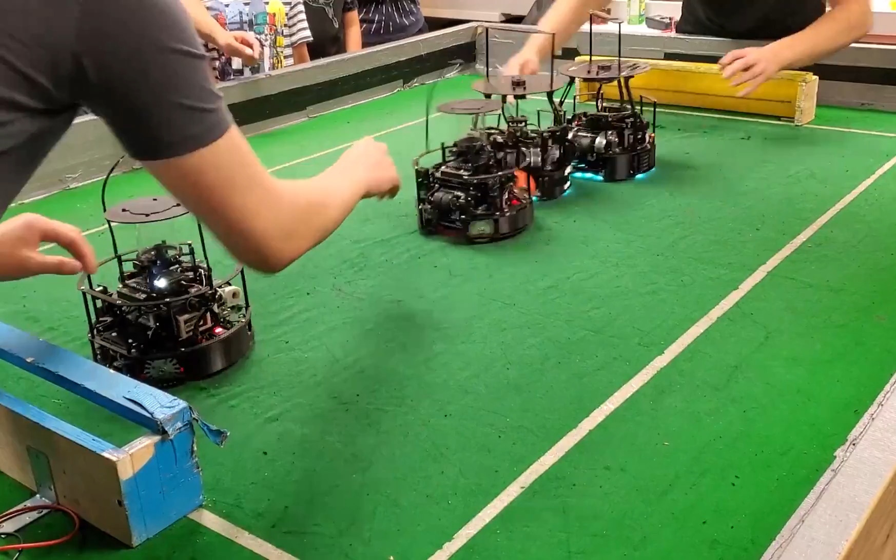Meet my robot. Built around a quad omnidirectional motor drive, it was made to compete against the very best in the RoboCup competition. With 2 dribblers, 2 kickers, and an omnidirectional camera, this robot placed second in the world for open weight. This is not my project, because it is garbage.

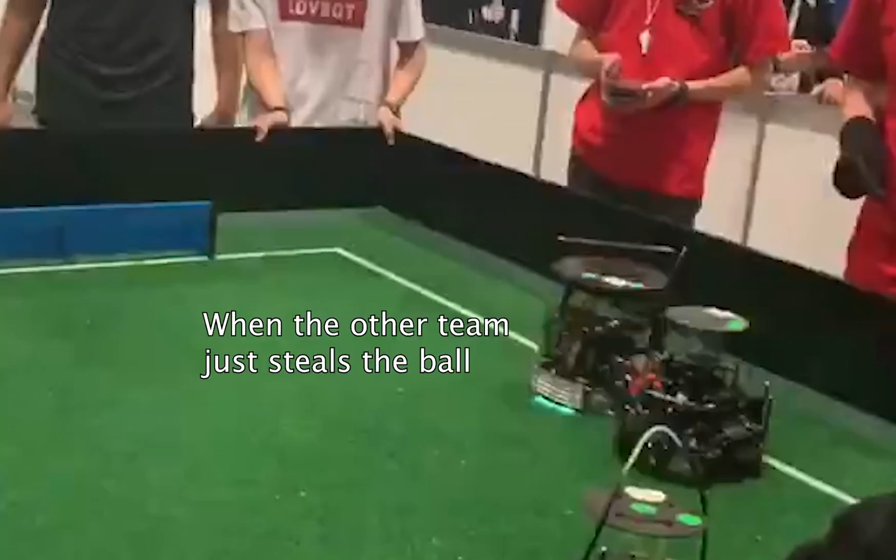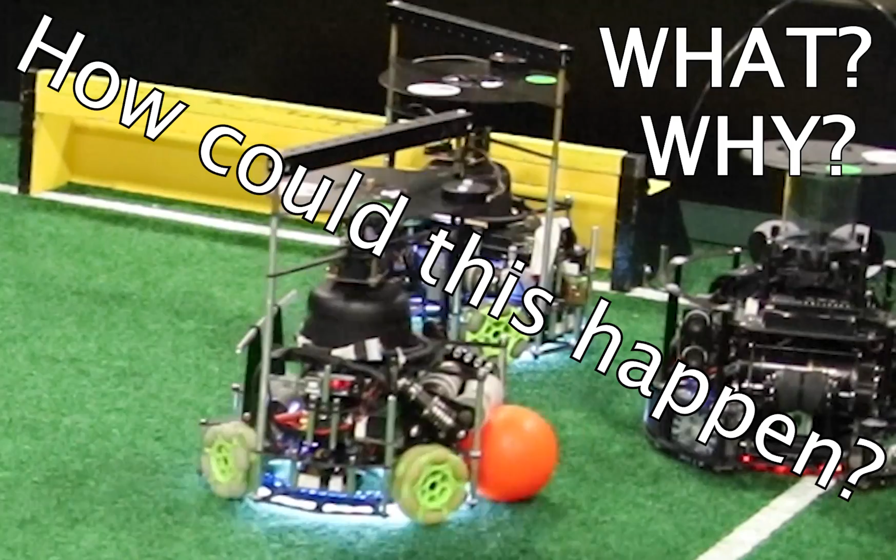The frame is too high, dribblers too weak, and one of the kickers doesn't even kick properly. It also has a problem where if you hit it hard enough, the buttons go all wonky and the entire thing shuts off. Like, what? Why? How does this happen? Come on! That's why I'm making it better.

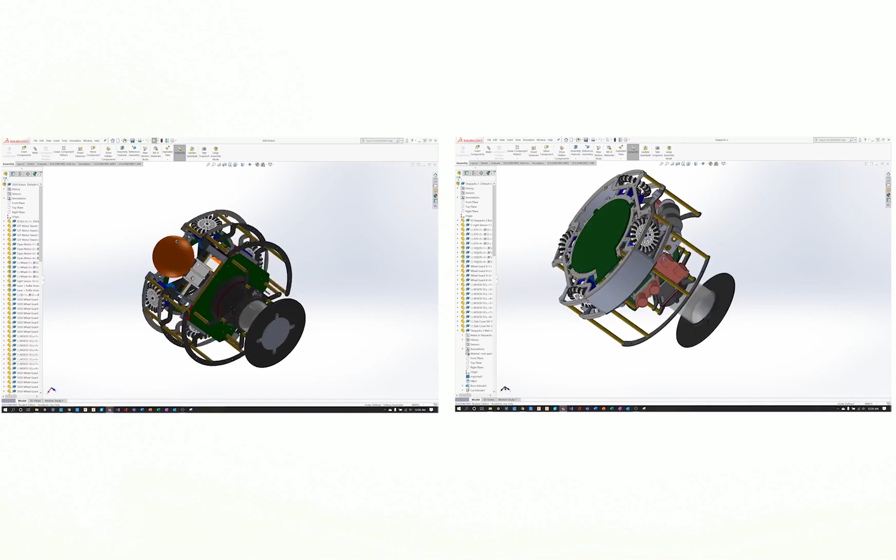So this is the new design. As you can see, it's similar yet different from the older version. It actually possesses a number of improvements, including a more optimized design, more features, better stability, and a lighter weight.

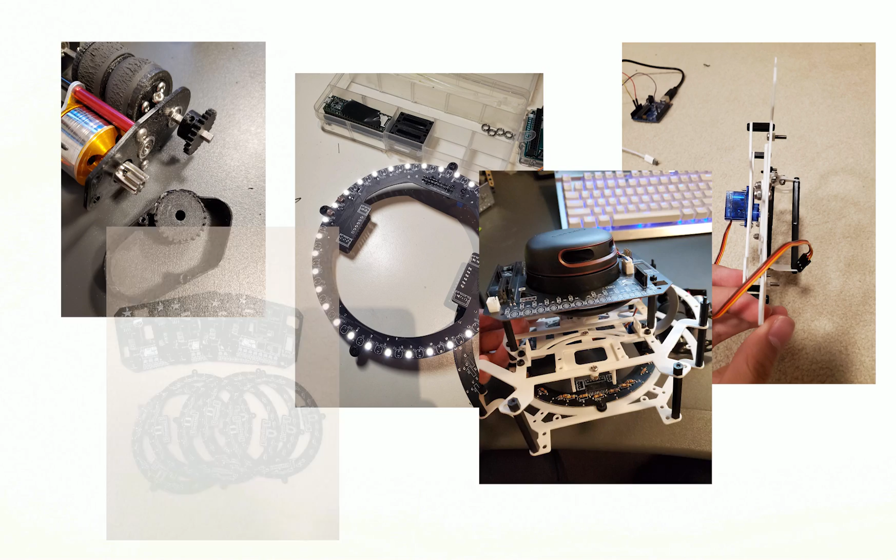I initially had the idea to complete everything and build it. But then COVID-19 happened. The supply chains for a lot of what I needed disappeared, meaning all that I had left was a series of incomplete components and designs. So essentially, that's what this project is going to be about.

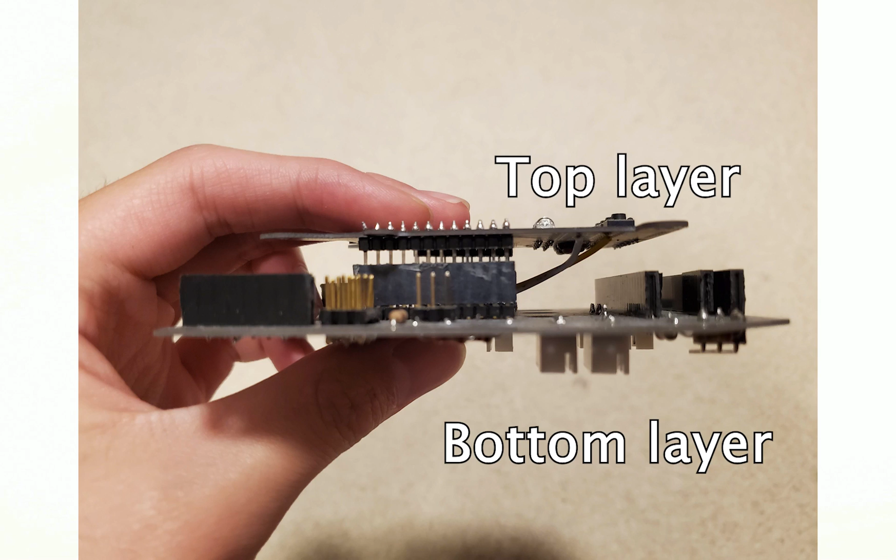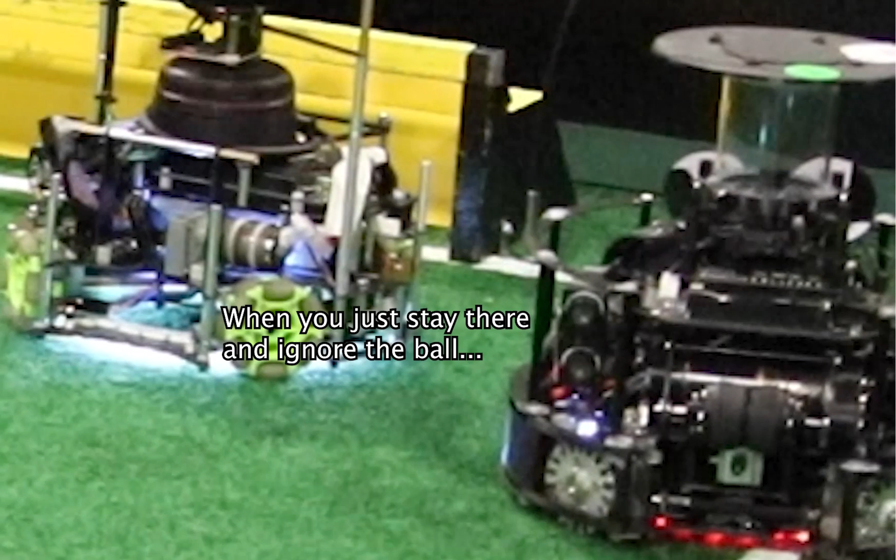One of the biggest issues with the old design: the buttons didn't work. When creating the previous design, I split the PCB into 2 sections, with the buttons on top and the main processor on the bottom. The issue? The connection was really dodgy, meaning the signal would randomly flicker and cause the robot to brick in the middle of the game. And if you can't tell, that isn't a good thing.

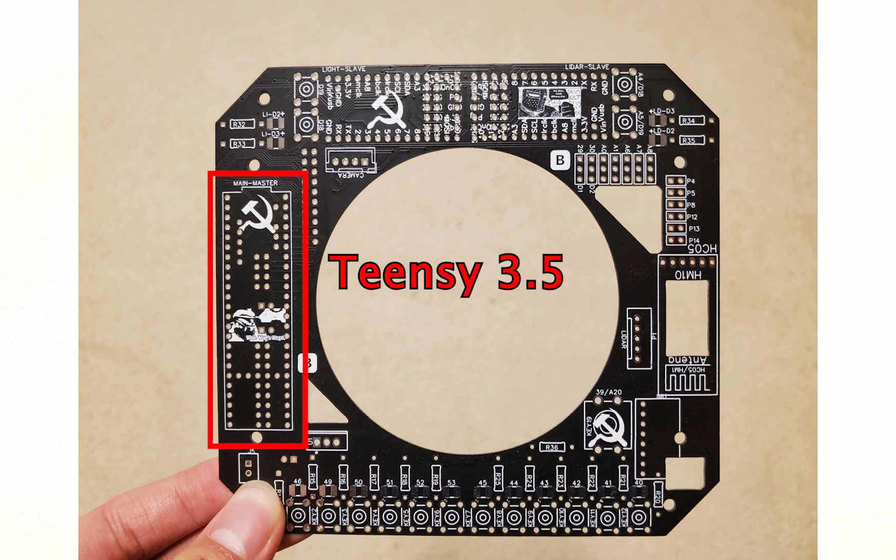So the first thing I did was take the old PCB and start working from scratch. The new design incorporated both layers into the same PCB, getting rid of the connection issues. I also replaced the processors, exchanging the 2 Teensy 3.5s with a single 3.5 and 2 of the new 4.0s, thus increasing the number of processors from 2 to 3. Because more equals better, obviously.

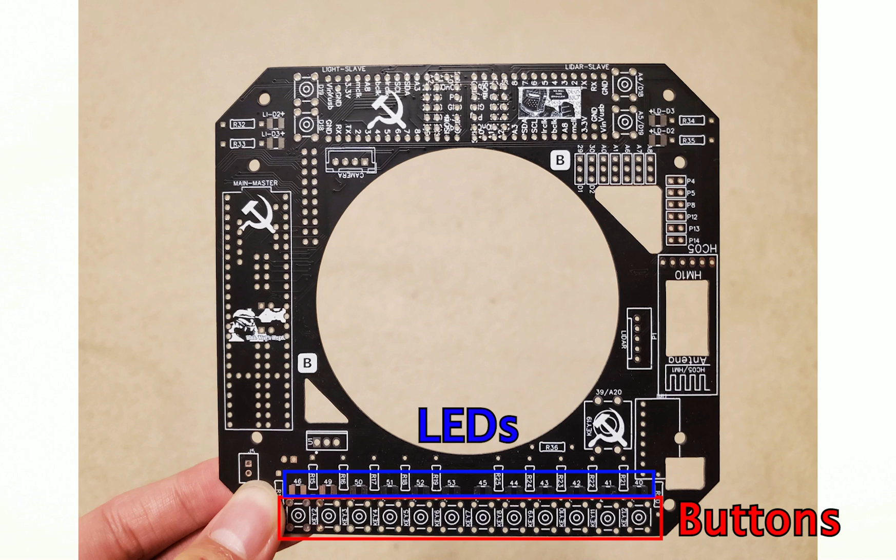The new design also incorporated a number of features, including more buttons and LEDs for better controls, a space for a Bluetooth module allowing communication between robots, and a small accelerometer, saving on weight. It also has a giant hole in the middle of it. We'll get to that later.

Next came the light sensor. The old one was nice, except for the fact that it was too tall, too fragile, and had this weird offset shape because I had to fit an entire processor under there. Essentially, it was all around not a good design. They also had another really annoying issue.

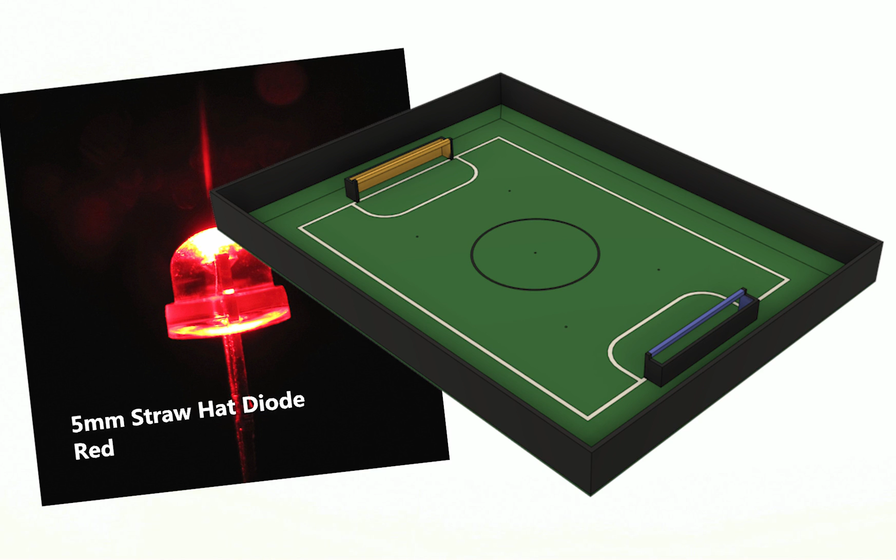When I was designing the original one, I thought, okay, you know what'll be a really good idea? Using some red LEDs because they offer the greatest contrast against a green field. Big brain move, am I right? As it turned out, nope. The color of the LED plus light bleed caused another issue. Essentially, ball equals orange, LED equals red. Robot cameras are bad, therefore orange equals red. Thus, other robots think ball equals LED, which is a big no-no.

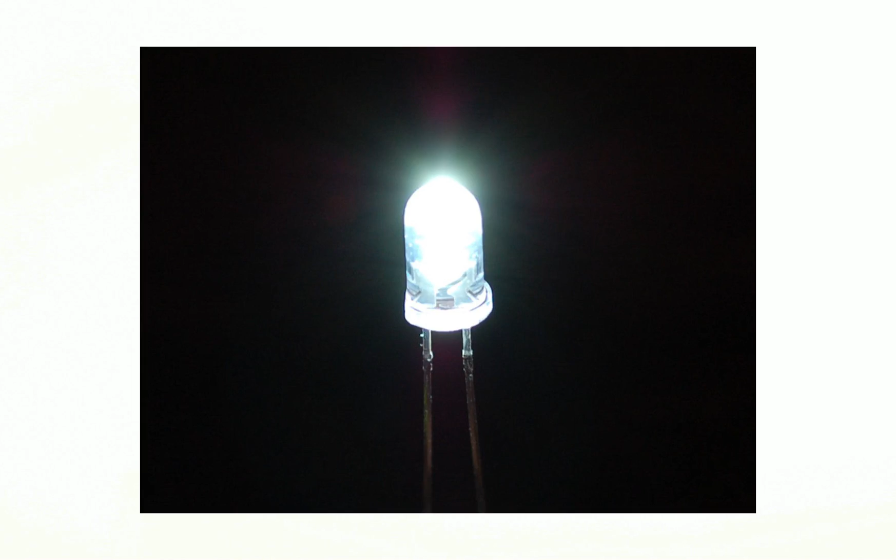Last year, we had to try and make do with electrical tape, and I was seriously not interested in going through that hassle again. So the solution? To stick with the old white LEDs. And hey, while I was at it, I decided to add some more light sensors as well, increasing the number from 24 to 32. Now that that was done, I decided to tackle another issue: the fact the light sensor looked like a flattened popsicle.

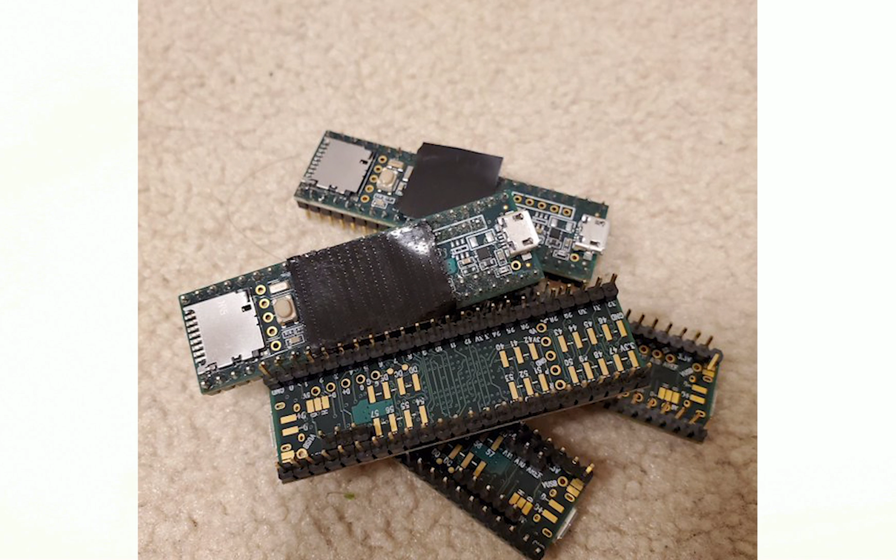In previous years, I placed the light sensor teensy at the bottom for convenience, but this year I decided to put it at the top instead, making it easier to access and replace, because boy did it take a long time to fix. And if the fact that we had an entire pile of broken teensies was anything to go by, we burned through these faster than stores selling toilet paper.

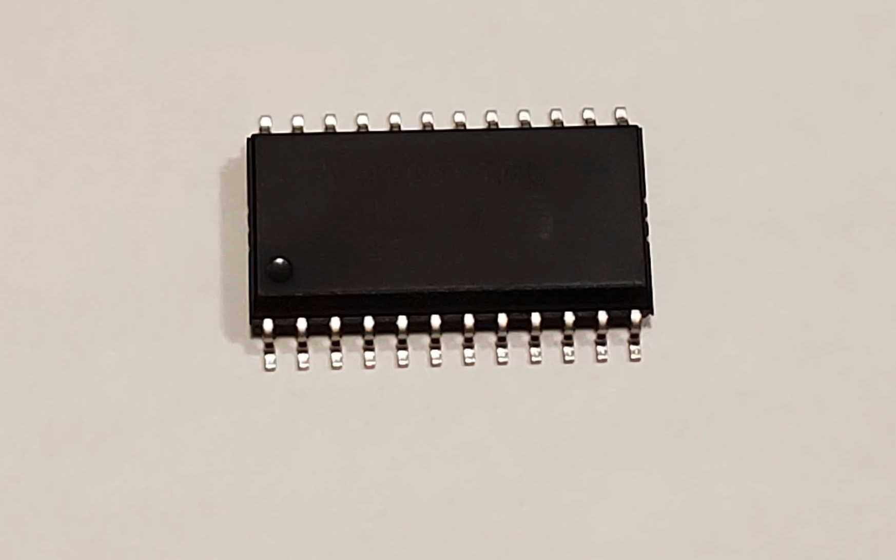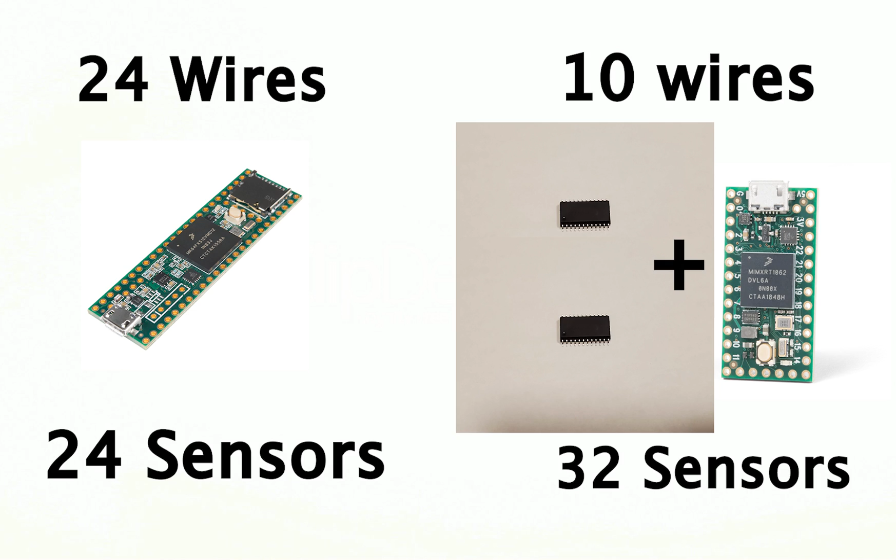There was also the issue of cables, so to resolve this, I used a multiplexer. A multiplexer is essentially a switch which connects one read wire to multiple sensor connectors, changing the 24 wires needed for 24 sensors to 10 needed for 32 sensors. All in all, a pretty good deal.

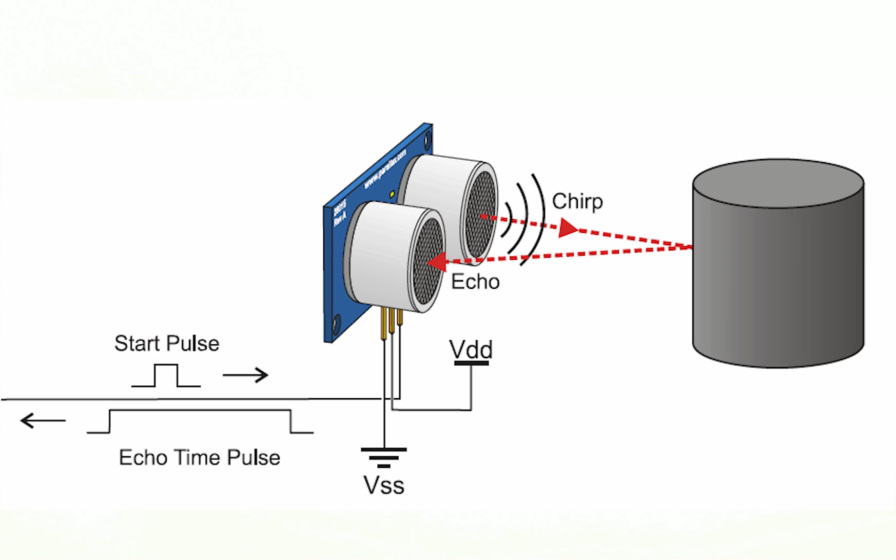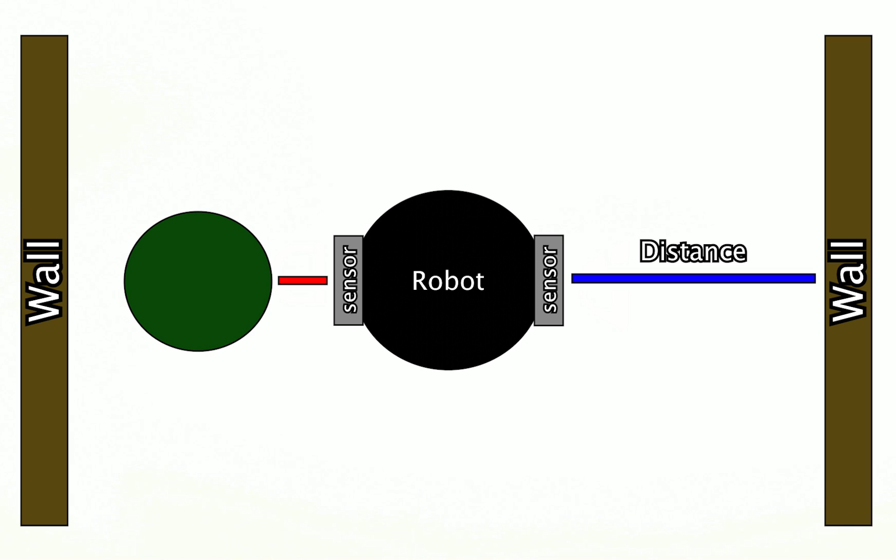Another issue I attempted to address had to do with the robot's ultrasonic sensors. Ultrasonic sensors are used to measure a distance, and placing one on each side of the robot can help you get its coordinates on the field, letting it know its location. But there's one big problem: as soon as something goes in between the sensor and the wall, everything starts falling apart. The robot doesn't know which is the real value and which is the incorrect one, and the location becomes lost with the entire thing going all whack.

So what's the solution? If measuring 2 values isn't good enough, why not measure all of them? This sounds a bit crazy, but hear me out. This is the Slamtec RPLIDAR. It costs a lot of money, but hey, I got it on sale, so might as well use it. It is essentially a spinning distance sensor, allowing someone to measure a distance in a 360-degree radius. That way, even if a range of values is blocked by another robot, the sensor can just see around it.

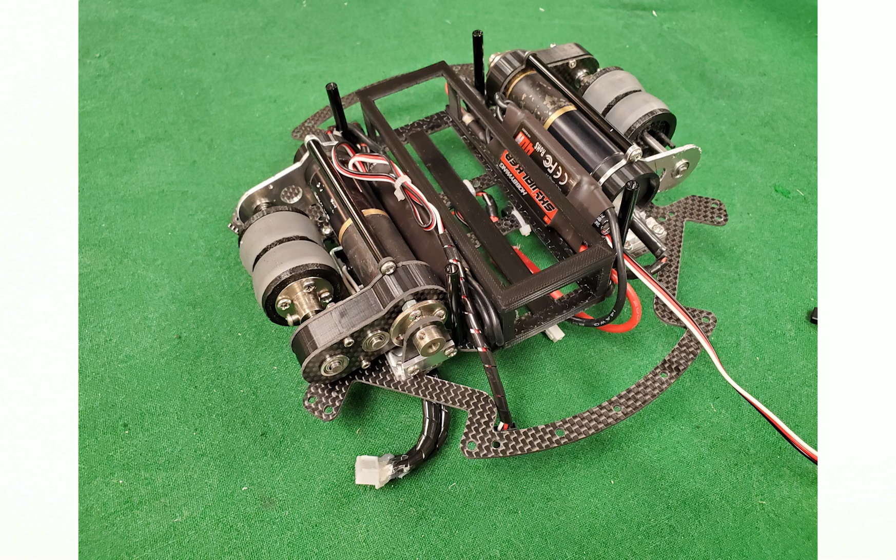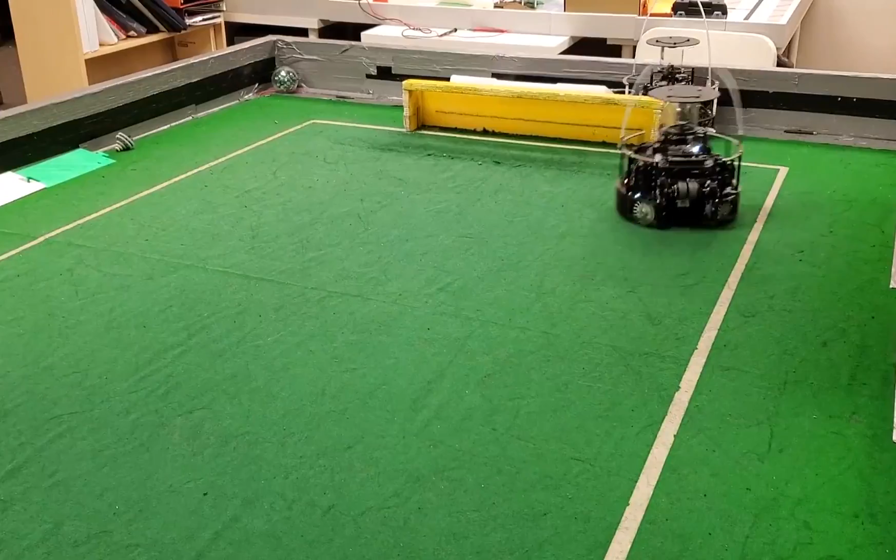Finally, I had to address the issue of the dribbler's power. The motor torque was pretty good, but since the speed was so slow, the grip on the ball was usually quite shoddy at best. The previous solution was essentially to tighten the dribbler's elastics and increase the downward force pressure, thus allowing it to hold the ball with a tighter grip. But this was only effective to a point before...

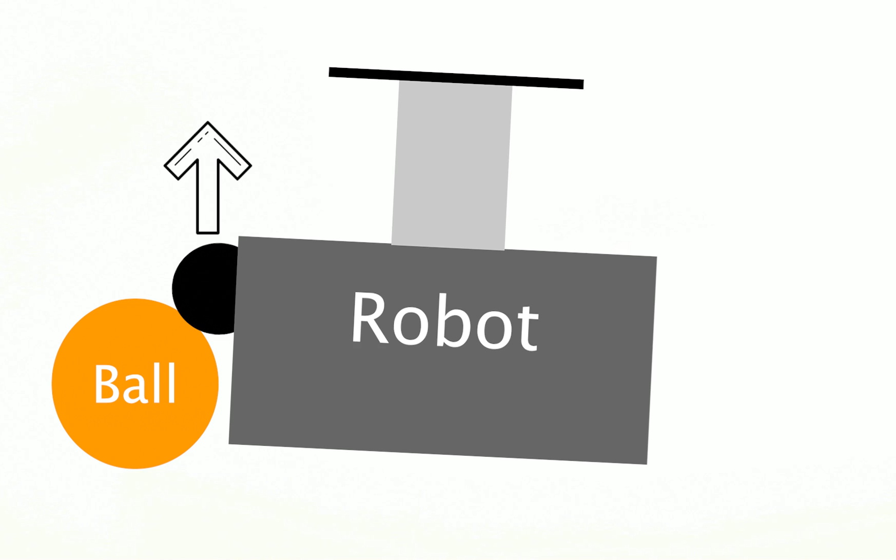What happened was, instead of applying more force on the ball, the elastics would just lift the robot up, causing the ball's backward motion to push the robot back, and yeah, it wasn't gonna work. Also, the dribbler was like 300 grams, which was super heavy for a competition where the max weight is 2,400 grams for an open league robot.

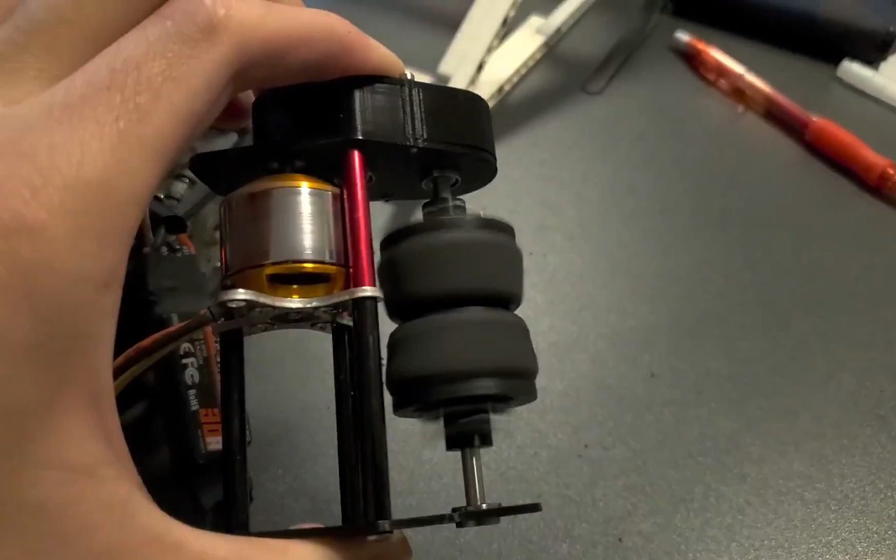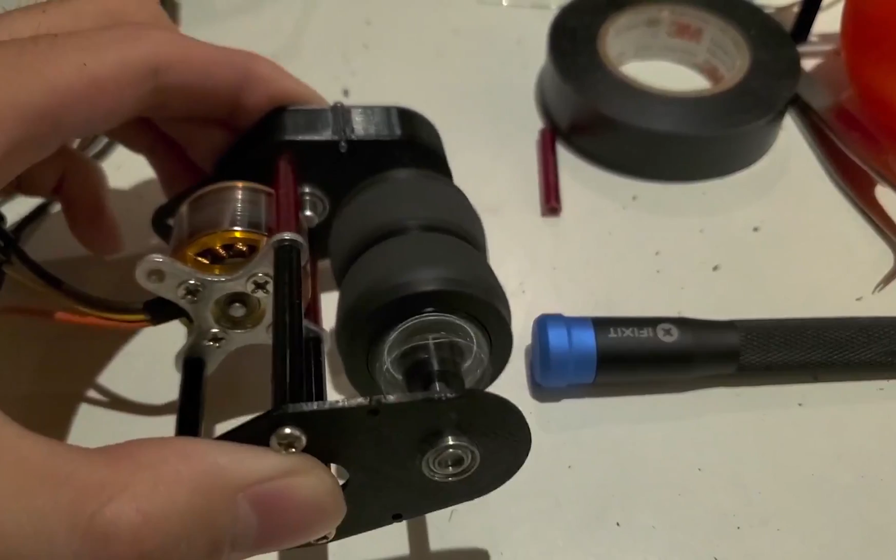The new dribbler is both lighter, weighing in at about 200 grams, and also runs at a considerably faster speed. It's scary how fast it runs. This design is a significant improvement over any previous designs and allowed the robot to better grab and hold the ball.

While I was doing this, I also upgraded the kickers as well. Previously, we had a front kicker that was good, but due to weight constraints, used a smaller kicker in the back, which was quite wimpy and essentially useless. This time, we used the same kicker for the front and the back, making sure that it could kick well in both directions.

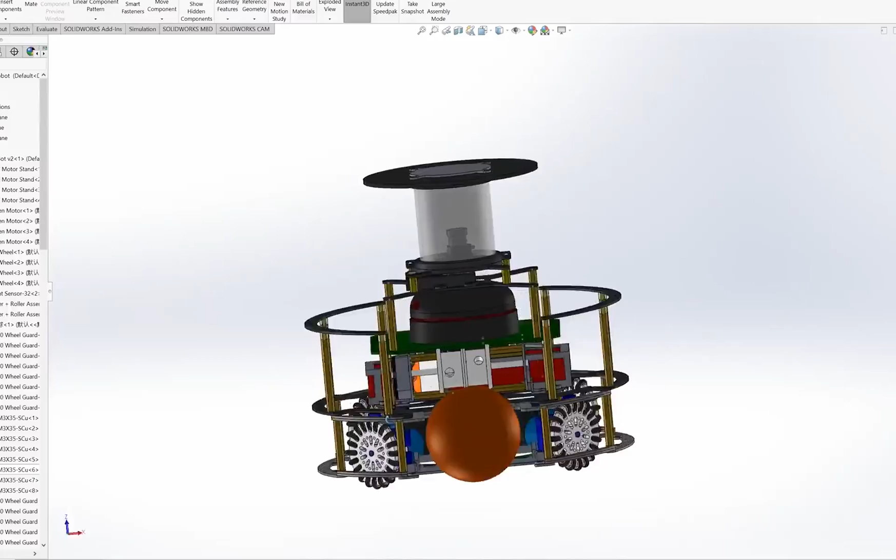Ultimately, through a series of trial and error in identifying specific issues with the old version, I was able to create a more efficient and effective new design, with many technological and strategic improvements that help it become a more effective robot in the competition. Now, if only I could have actually used it in the competition, if it weren't cancelled.